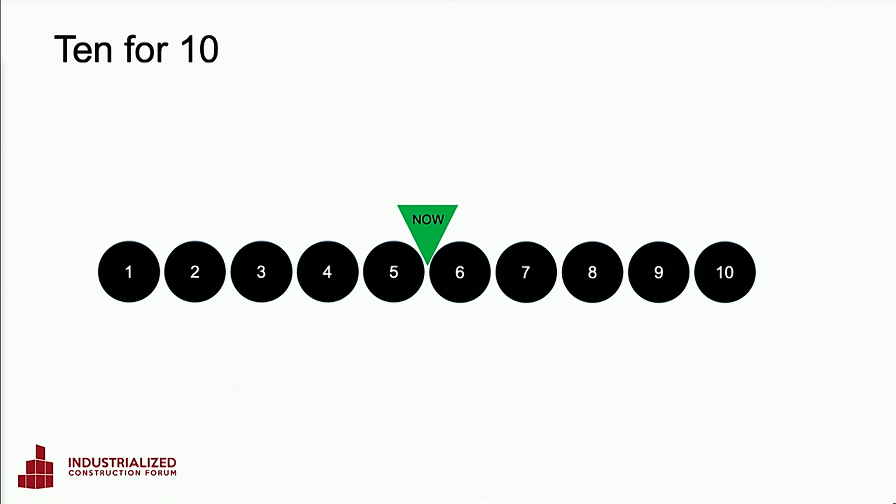Yeah, and so the way we decided to organize our talk, and we wanted to make it a shared talk, which is not easy, but we think we have a format that worked, is we're using the format of 10 for 10. So maybe some of you know the American sports broadcasting company ESPN. They did a 30 for 30, where they came up with 30 short documentaries to celebrate their 30-year anniversary. We wanted to come up with 10 points about industrialized construction to celebrate the 10-year anniversary of this forum, which was started as a way to really create a knowledge exchange and an interest and sharing for industrialized construction.

And then we split that into two different sections. So first, we wanted to look back. We think it's important to recognize what's happened in the last 10 years as a foundation for where we are today. So the first 5 points that we have are related to the past and what we've discovered in the 10 years of doing this event. And then looking forward, we want to give 5 points for where we think we're going, where we think the challenges are, where we think the research and the industry innovation opportunities are in the next 10 years or 20 and beyond. So that's the format we're going for, and with that, I give it to Jerker, who will start with our first one. Okay, thanks.

So we actually took off this journey based on the Swedish roots. And that's because I'm from Sweden. And it all started in 2013. I was invited to come here as a guest researcher, and I spent 4 months here at Stanford. And I brought my research and my industry experience from Sweden about industrialized construction. And I got the chance to give a course about this topic where I could collect my thoughts and my research material and the framework around industrialized construction and bring to the students and researchers around here. And that course became the spark and the start of the journey of IC around here.

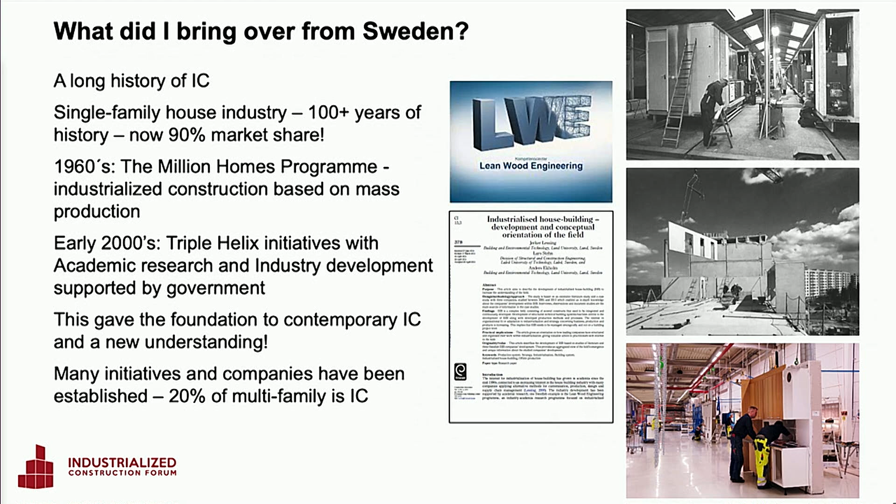But what was maybe more contemporary was the early 2000s, where we had a couple of very important so-called triple helix programs, where industry, academia, and government collaborated to really push the knowledge further about industrialized construction. So that laid the foundation of contemporary and, so to say, modern thinking around industrialized construction. I was part of at least 2 of these programs.

And that gave also many initiatives, both academic, of course, but not least many different development initiatives, and that was really anchored in industry, and that sparked really strong development in our industry, and we can see the effect of that now.

But then, the year after, we organized the first Industrialized Construction Forum in December 2014. Daniel and two other students were organizing, and I was invited as the keynote speaker to talk about what happened, the knowledge from Sweden. So the circle is now closed, I think, in a way. We had some other pioneers from around here, from California. We had Bone Structure, Project Frog, Clark Pacific, ConXtech, pioneers that shared their inspiration and also development and what they saw.

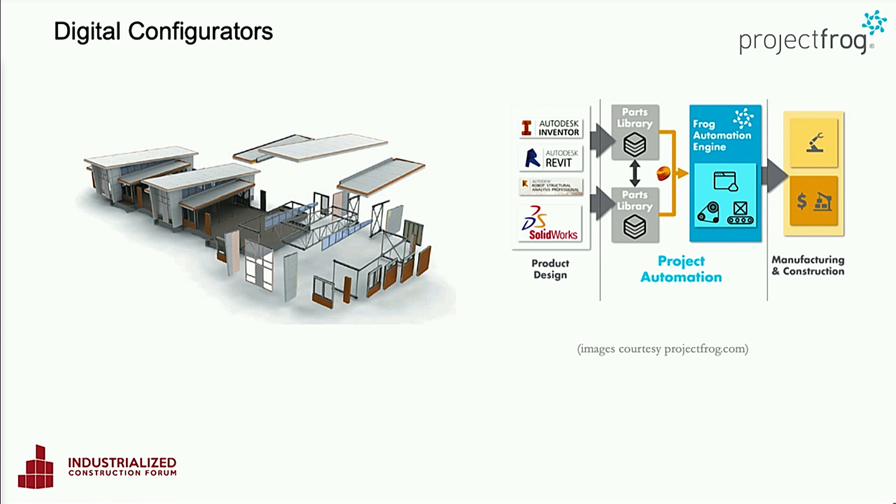They started talking about having a kit of parts, and this was in 2015, but then also taking that kit of parts and building a digital configurator to allow them to coordinate where the parts and pieces would go, to create a kind of design constraint system so that you have a connection between your design space and your production system. And in the meantime, doing this all without themselves owning a factory, but coordinating a supply chain to do that.

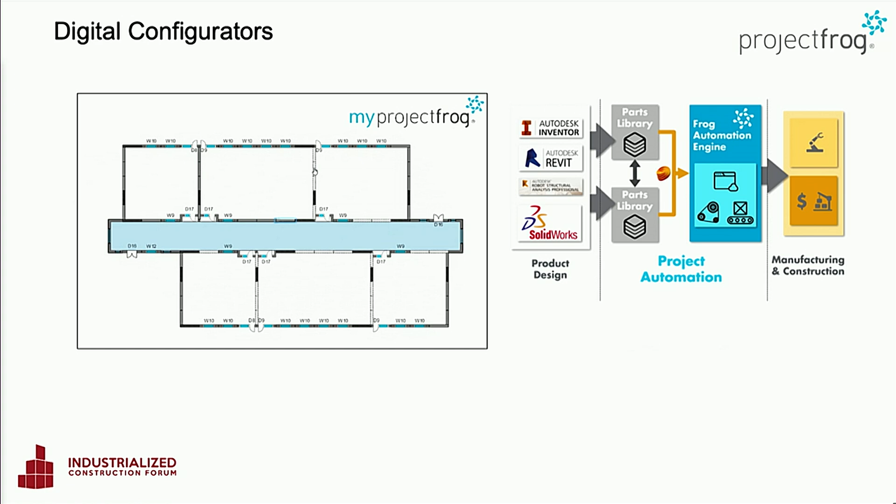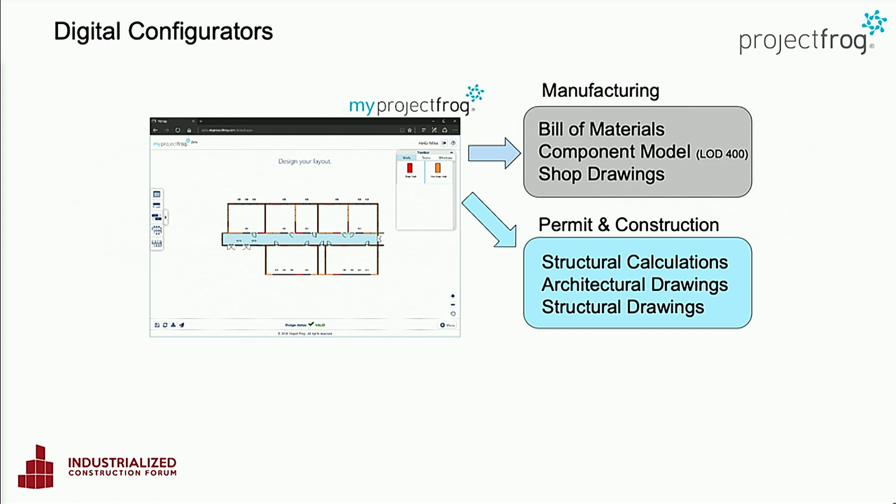And for me, that was really a radical moment to understand that this might unlock some of the ideas that we've been talking about, and also allow it to have an automation process. So from there you can immediately generate your bill of materials, your shop drawings, all your calculations. And they were able to do this in a matter of minutes and hours, in a process that for a normal project built from scratch might take weeks. So that was back in 2015, and for me, I thought that this was the link between the idea of a product platform and mass customization.

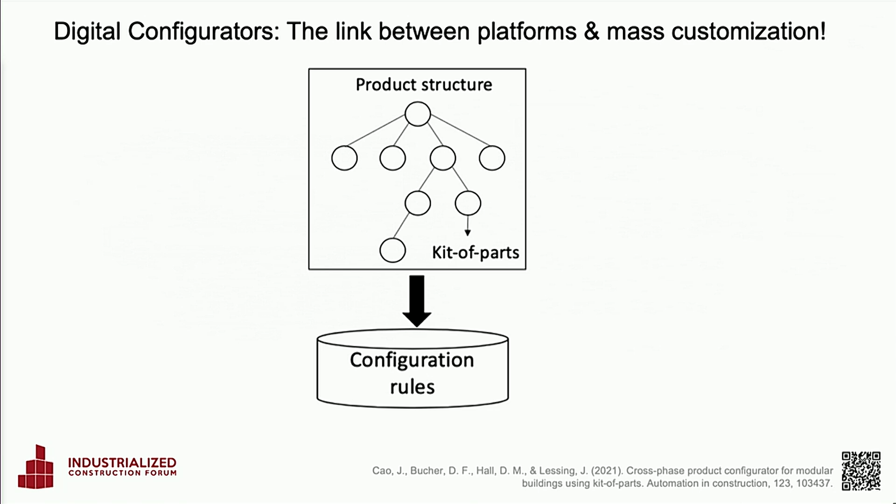And I won't say too much in detail about this, other than that when you have a product structure with a kit of parts, you can then encode your configuration rules in a certain way. And that really becomes a customer acquisition tool. It allows a designer or a customer to have their inputs, their preferences, that don't break the constraints of your system. And in the end, you can achieve this idea of a customized product, or mass customization, which to me seems to have been one of the important goals of the last 10 years: how do we achieve some degree of flexibility that customers want, while also getting the benefits of an industrialized production system.

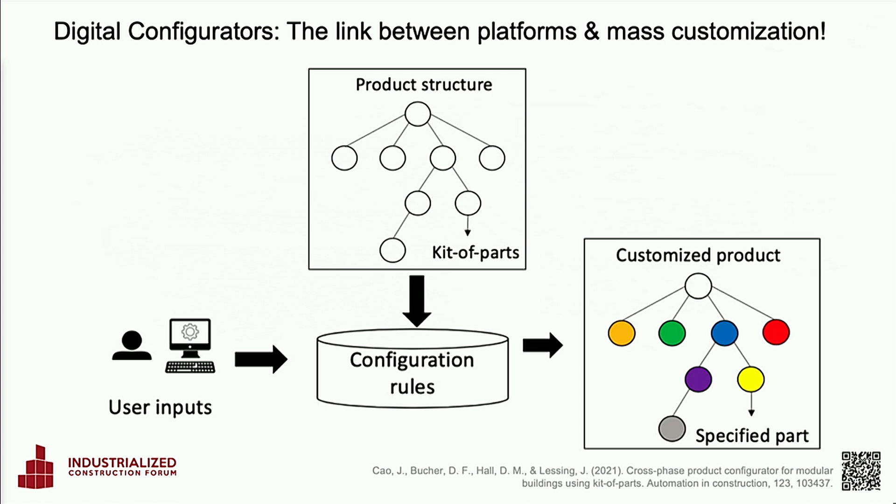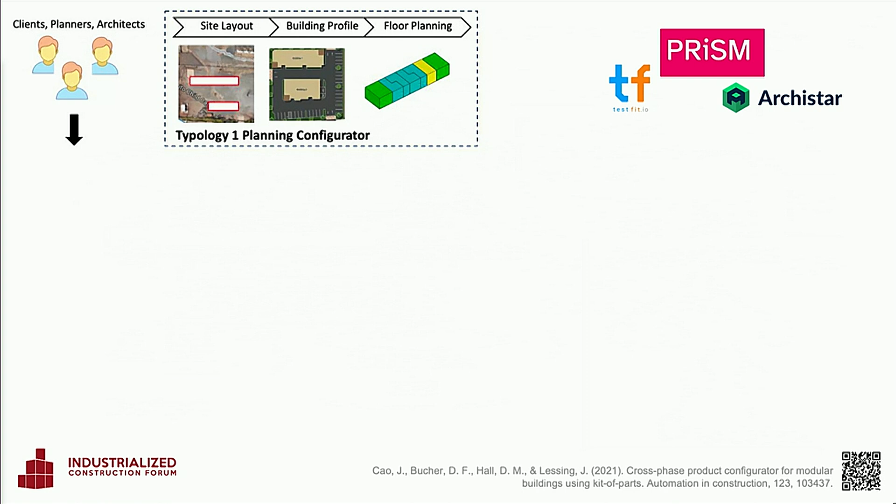And we continued that research, and we identified that there were actually three levels of configurators that people were working on. And many of them are past speakers that we've had in the last 10 years. We have typology 1, which we call the planning configurator, which really helps you at the real estate development level understand the setup of the site, the setup of the modules, to figure out where things might sit. We also have the example of what I'd call a design configurator, where now you're really getting into the design.

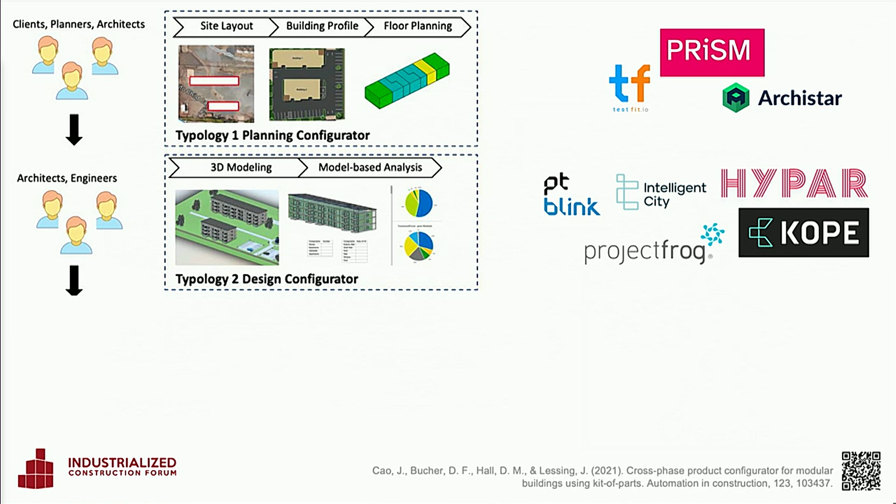And then we've also seen type 3, which is this idea of a production configurator. So there, you're really getting into the actual kind of ERP system for construction, of connecting between the actual layout of your wall panels with your scheduling and bill of materials and et cetera, so managing that.

And so we've seen a number of companies that have attacked or tried to understand this idea of digital configurators in different approaches. And this was our kind of research to help us understand how do we think about these different levels of configuration. But anyways, all of that kind of gave me a perspective of the California digital innovation combining with the industrialized construction approach. And that leads to our third point.

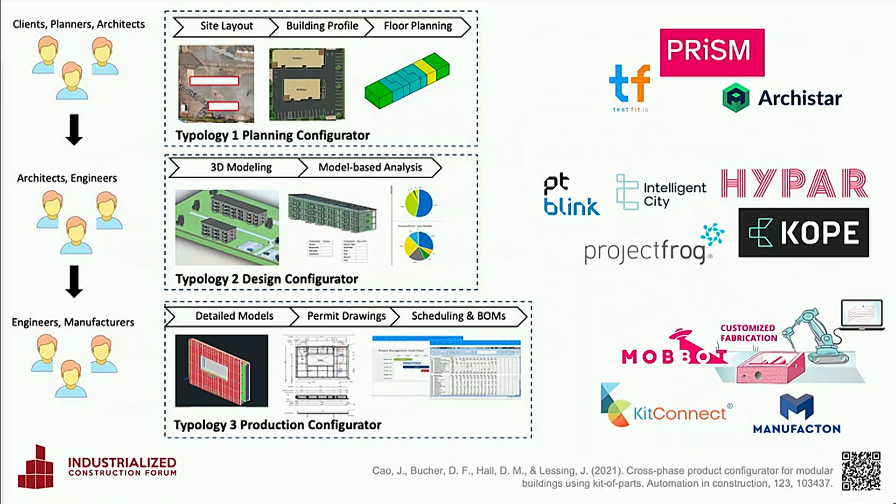Third point is this, that industrialized construction is not the same thing as prefabrication. It's an important part, but these two are not synonyms. And that has been a recurring topic, I think, in talks like this, because it requires some explanations, and going through that has been important, because otherwise I think we would be stuck in more historical ways of seeing what this is about. So I will talk a little about that.

It's not a lecture about it. Some of you were in the intro class yesterday, where we talked a little more about it. But the summary here is that industrialized construction is not only prefab. It's not only the choice of a production method, even.

And if we look a little into history, prefabrication was actually introduced many, many years ago, at least at scale during the 1950s and 1960s. But if we look at the curves that I won't show you, all of you, I think, know the productivity curves, where construction has remained pretty flat. It did that even though we introduced prefabrication. So obviously that did not solve all our challenges in construction.

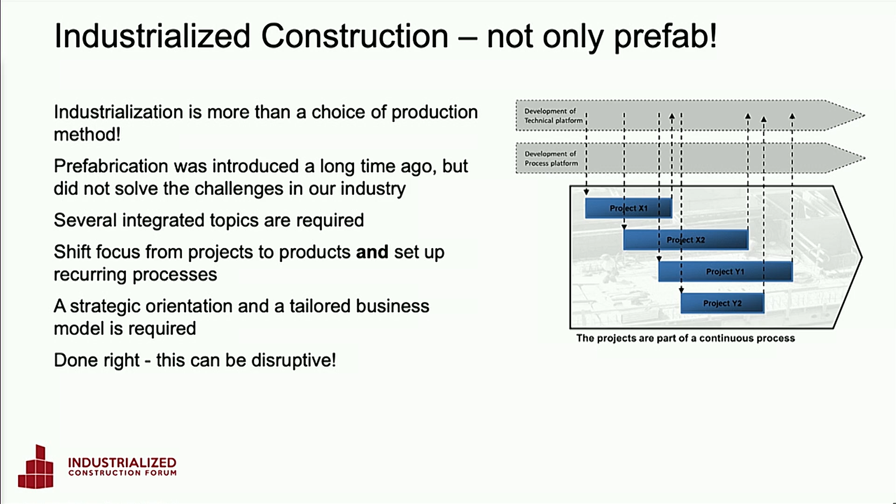And that requires a strategic orientation, tailored business models. Otherwise, if we are, so to say, stuck in the projects, it will be very difficult to gain all the benefits out of an industrialized process. And if it's done right, this can be disruptive for our industry.

Just to emphasize a little more on this, that prefabrication is not alone the solution for our industry. I actually recently found these figures that in Sweden, the use of prefabricated elements for the structural frame for residential buildings is very, very high. It's actually increased from 1995, when it was 62%, to now it's 88%. So 88% of all residential projects use prefabricated structural frames, super high.

But we still struggle in the, so to say, traditional part of the industry with productivity issues and all the other aspects of our industry. On the other hand, a pretty recent study of industrialized construction companies showed that we had an increase of productivity of 20% during the years 2014 to 2020. We had an average of 3.3 months shorter lead times, and we had a cost decrease of 16%, while the more traditional part of the industry had an increase of 20%. So when it's done in this more integrated way, we see the effects coming.

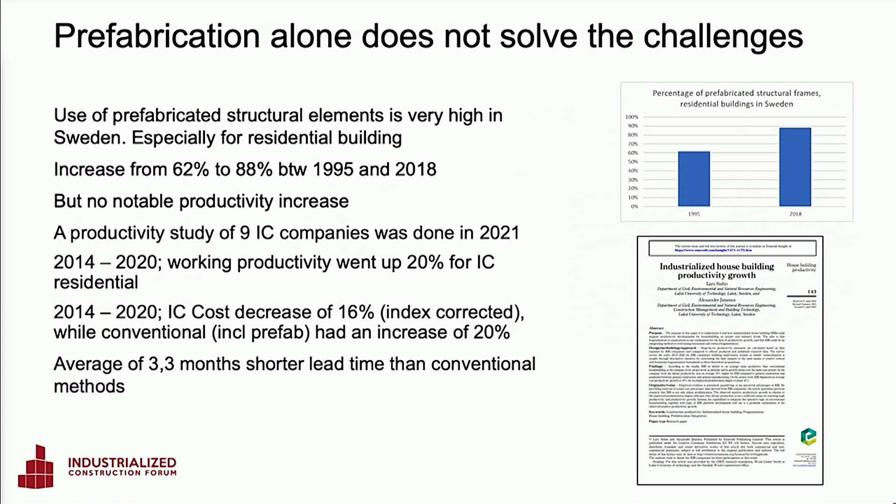Just to give you also this glimpse, okay, so what do we then mean with the integrated approach? Well, this is what I mean by industrialized construction ingredients. All these aspects are needed to create a concept of industrialized construction, but in different ways, of course. And you have seen them all in many, many ways, many different initiatives.

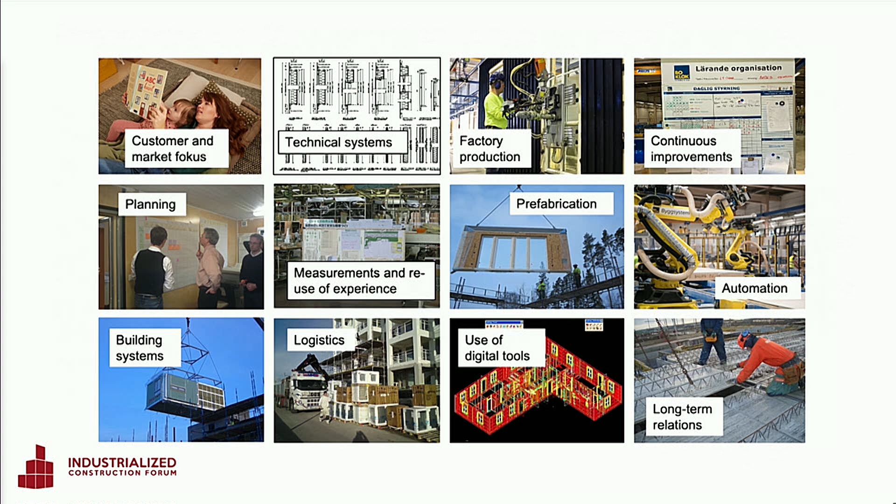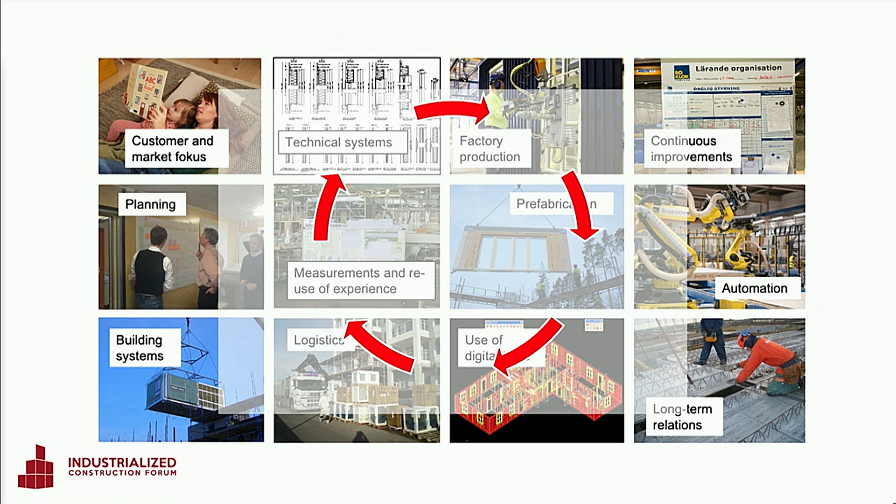The most important thing is integration, that all these sub-areas are required, but they also need to be integrated with each other to create a really strong concept, both in the design aspects and the production aspects, and not least to have a really, really strong understanding and insight about who the customers are and what they want, and so on. So super important to remember this, that prefabrication, production methods, of course, very important, but not the only thing.

And this was also early on collected into this model that many of you have been acquainted to. So saying basically the same things. So that was a very important part of the foundation for what industrialized construction is, and that's what we try to embrace here.

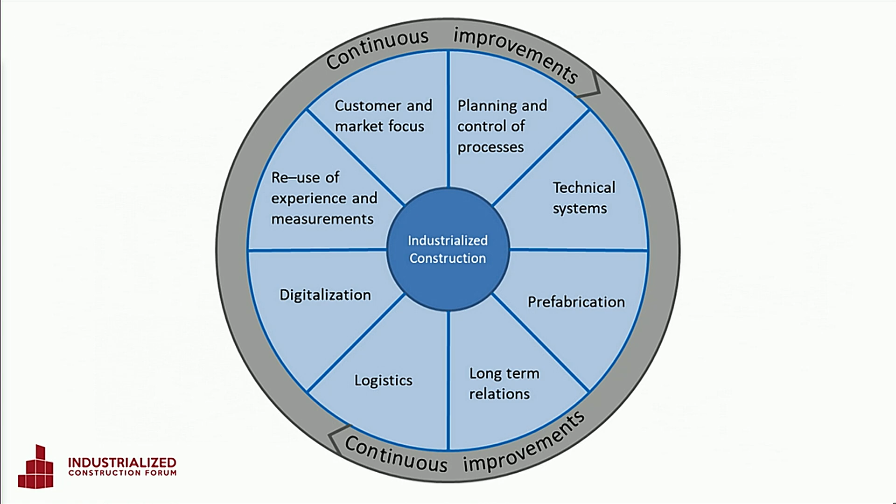And furthermore, what we saw also is that while this model gives a high-level view of what industrialized construction might be comprised of, how you specifically apply that was done by different companies in different ways. And for us, that was a very interesting insight to understand that what we'd call strategies or business models were emerging that would traditionally be the general contractor scope of work, but we saw that companies were taking very different approaches to understanding industrialized construction and changing their business model.

The first one is the idea that a general contractor would say, okay, we want to invest in a kind of spin-off factory, or we would like to invest in a way that we go away from just managing contracts. We want to actually invest ourselves in the factory and building products. And so we've seen a couple of general contractors who typically have a lot of digital innovation also making the next step and moving towards development of their own prefabrication factory.

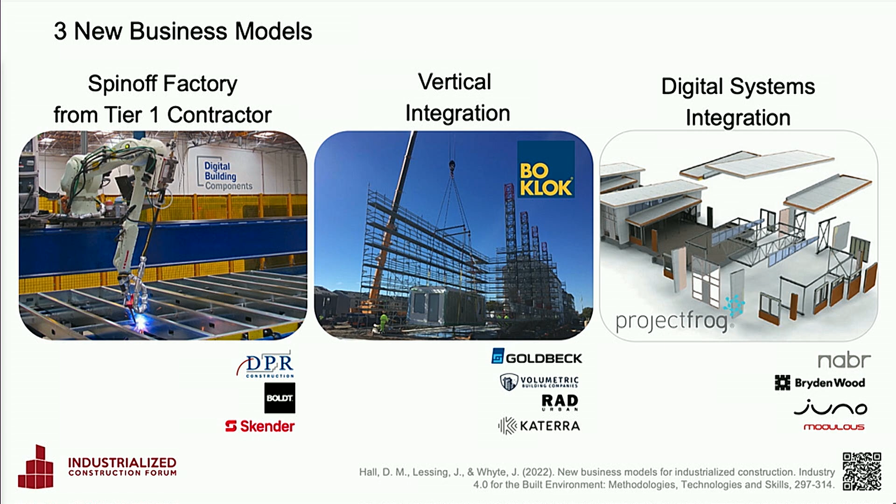We've also seen the example of vertical integration. So we see companies saying, we're going to go for full stack integration. We want to combine land development, we want to combine design and connect it to fabrication and assembly on the site. And we've seen a number of companies with that approach, including BoKlok in Sweden.

And then finally, we have the example of the digital systems integration, which I mentioned earlier. So this is the idea of a capital light, asset light approach. So you really work on organizing and orchestrating the supply chain with a digital system without actually having to own the factory itself. And we saw recently a number of companies that have really gone towards this approach.

In our first session today, you're going to hear also from a set of companies that are thinking about how to meet the needs of their customer. And maybe you can think about also which business model are these companies applying? Is it one of these 3? We also don't say that there is a right business model. People ask, what's the right way to do industrialized construction? And there we often argue it's really about looking back at the customer and the customer needs and the connection with also the production system that you want.

And I think it's interesting, on this list we have companies, and among that list, there's three companies, one in each category, that haven't made it, right? So that haven't been successful. And even a couple years ago, we heard about the challenges of industrialized construction, and we can learn from some of the attempts that did not work.

But just to understand how we see the strengths and weaknesses of the different approaches, for the first one, the nice advantage is that you don't really change your core business. So if you're managing projects and you invest in a spin-off factory, you're not really doing a full shift. You still keep your normal business, but you allow yourself also to have a structured learning process where you're able to learn from the prefabrication approach. The challenge is that you have very slow implementation. You have to really re-educate your supply chain over and over again, project by project, and that can be very frustrating.

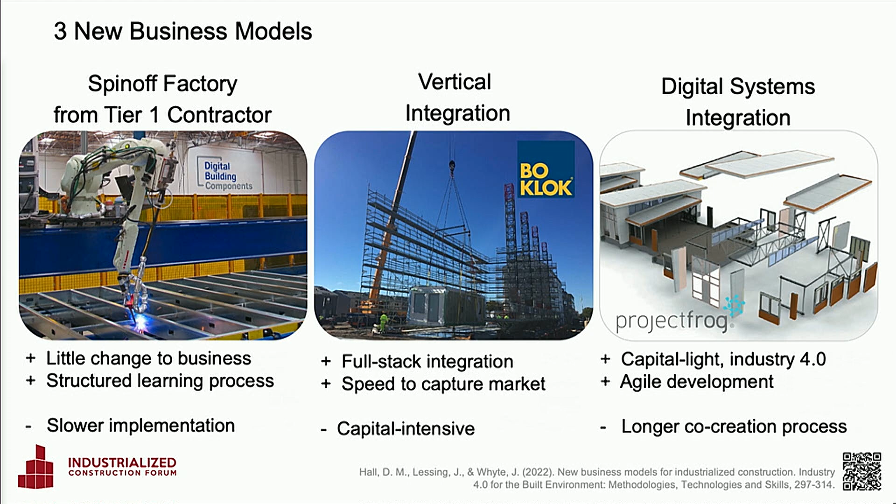So again, these are 3 business models we've identified, and we think that it's very interesting to see how people are evolving their business strategy in order to kind of take advantage of the opportunities that industrialized construction offers.

And then, looking back again a little on history, or very recent history, we experienced the boom, as we want to call it, a couple of years ago. 2018 to 2020, something like that, the interest in industrialized construction really exploded, maybe a negative word, but it grew a lot, at least. That's also when we took the forum from a half-day event to come to this room and fill up with 170 people. And I think that, to some extent, also reflects the big interest in this.

The common insight was that construction needs to change, and industrialization, in some sort of execution, is at least an important part of the solution. And we saw during these years many different reports stating the same things. Productivity is not good. We see other industries doing much better. We can learn from them, and so on. Not least money, cost levels and price levels, super important, but also to tackle the climate crisis, and industrialization was seen as one way of tackling that. We will come back to that pretty soon.

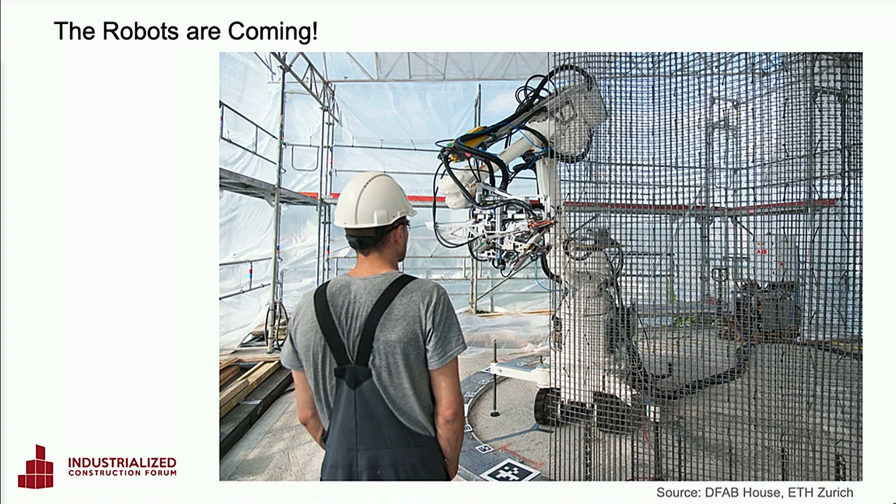And I'll start by saying the robots are coming. Those who have been around this space know there's been a lot of advancements and also a decrease in cost of robotics, both in the factory and on-site or near-site. We see many different applications, highlighting a few people that have spoken in the past, with ideas around robotic fabrication lines, project layout and controls, wearables, 3D printing, and single-task on-site robotics. It would be very interesting to think about how these ideas of robotics integrate with the holistic view of industrialized construction.

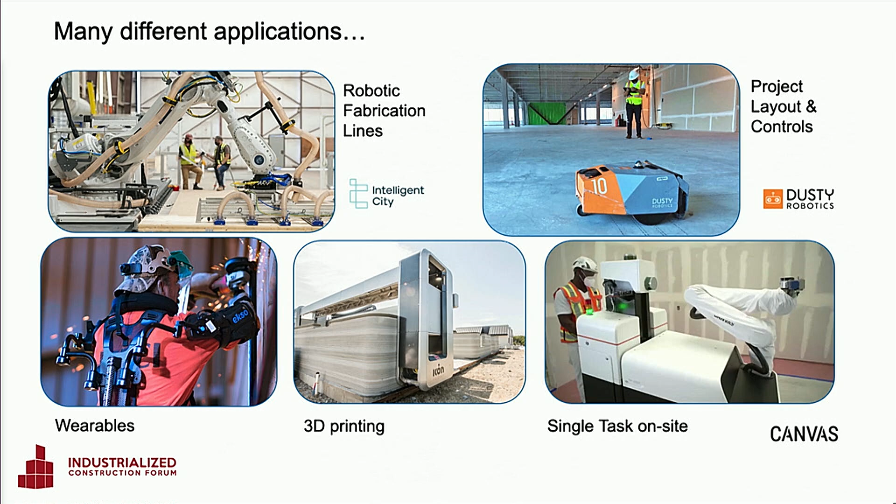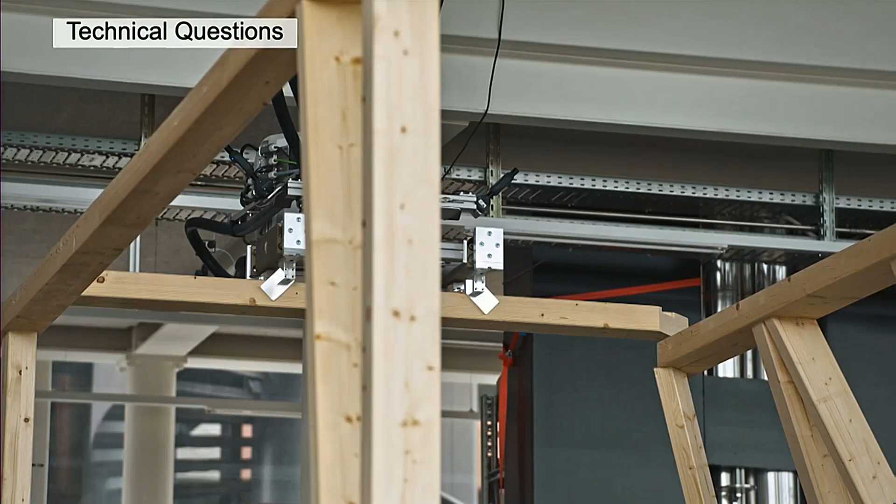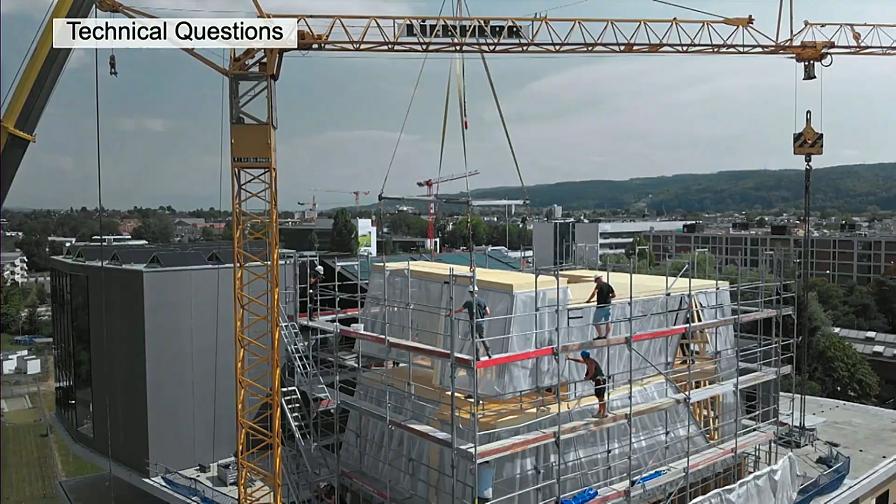They can come together, but there are also important questions to be answered. We have a lot of technical questions, and here I refer back to a project I was connected with as a professor at ETH Zurich called the DFAB House, with spatial timber assemblies, 3D assembled with robotic fabrication. There are questions around computer vision and sensing, fabrication-informed models connecting the file to the factory, and tolerances and how to robotically integrate fabrication and assembly on site. In addition, there are broader industry transformation questions, and the question we always get: will the robots take our jobs?

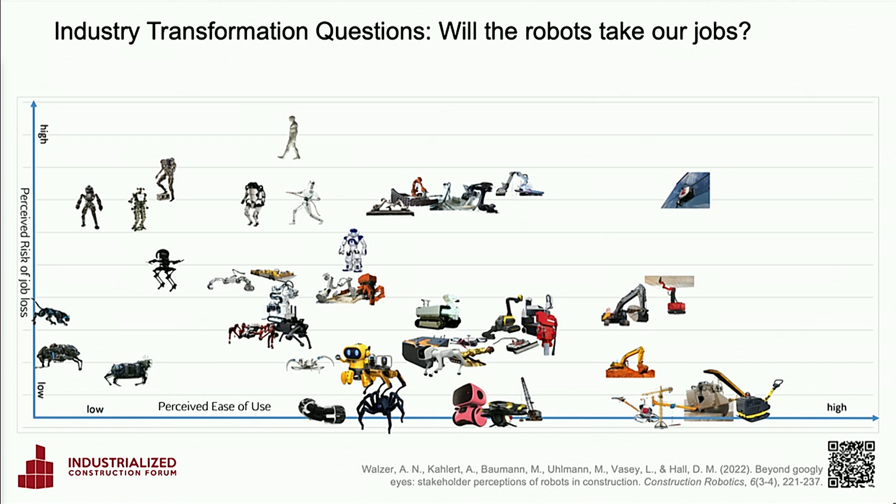This was a study we did a couple years ago where on the y-axis you have the perceived risk of job loss, and on the x-axis the perceived ease of use of construction robotics. And so we were able to map and think about the different ways that workers and managers also perceive the coming robotic trends.

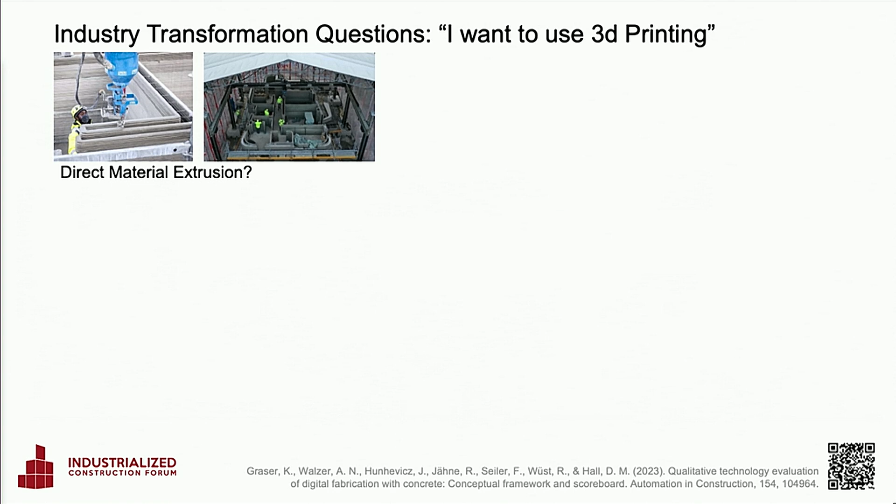We also have a lot of, I think, unknowns and connection between industry and academia. For my favorite example, it connects to a study we did where we have a lot of industry who'd say, I would like to use 3D printing, right? So it's super in vogue. It's all about the future of technology. But very quickly, you ask, well, what do you mean by 3D printing? Because that's a huge question.

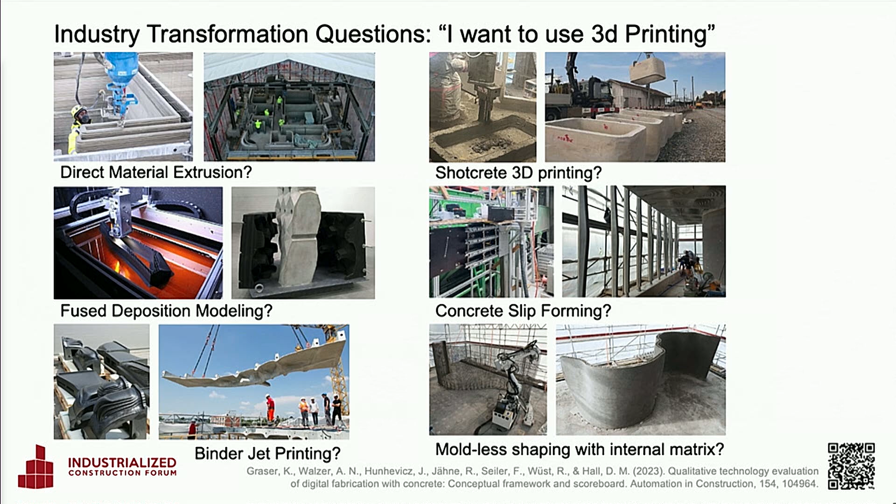Are you talking about direct material extrusion? Are you talking about shotcrete, fused deposition modeling? Are you talking about concrete slip forming? Binder jet printing for the formwork, so you have traditional concrete, or moldless shaping with an internal matrix, right? These are 6 different digital concrete technologies that we identified. And inspired by the view of industrialized construction, we try to also have a holistic view and a framework to understand digital fabrication with concrete.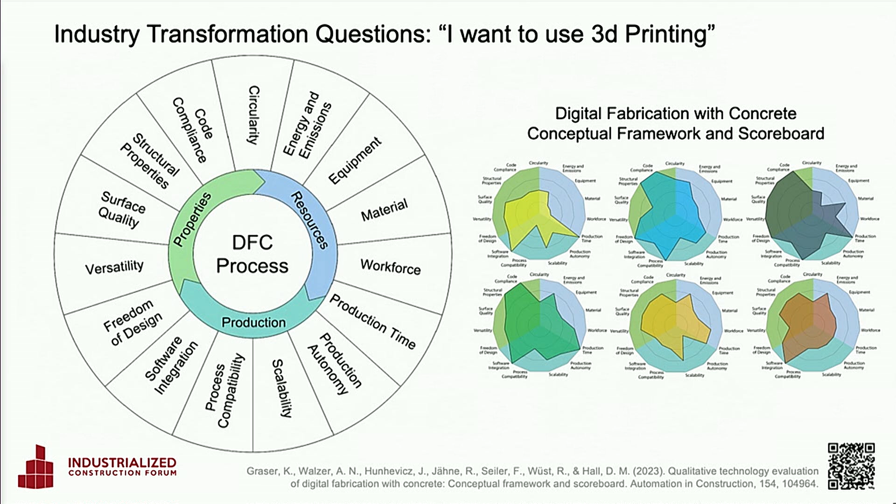And then we're able to also say, okay, if you're an industry and you have certain needs, can we map the needs that you have along these different categories with the specific capabilities of the technology as it exists today, and maybe how we project it to go forward in the future. So on the question of robotics, I think it's certainly coming, and there's still also a lot of open questions that will need to be responded to.

Then, as I briefly mentioned, we are in the middle of this, but there will not be less of this. We will have even more focus and challenges of tackling the climate and housing crisis. Two mega trends that to some extent, or quite a lot actually, are a paradox. Because we have a global shortage of affordable quality homes. We need to increase the building of new homes to fill the needs.

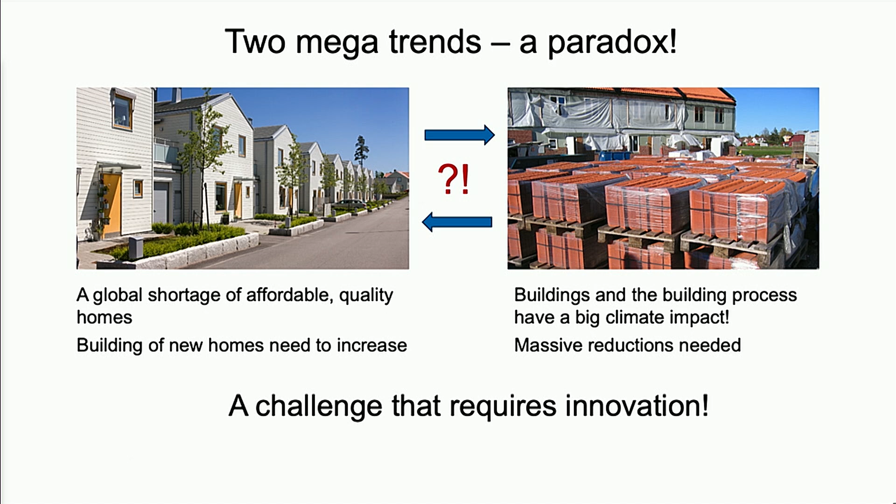On the other hand, as all know, buildings and the building process have a huge impact on the climate. And we actually need massive reductions to deal with that mega challenge. So how can we deal with this? We need to increase, but we also need to reduce. That is a challenge that requires some serious innovation. So what role can industrialized construction play in this then?

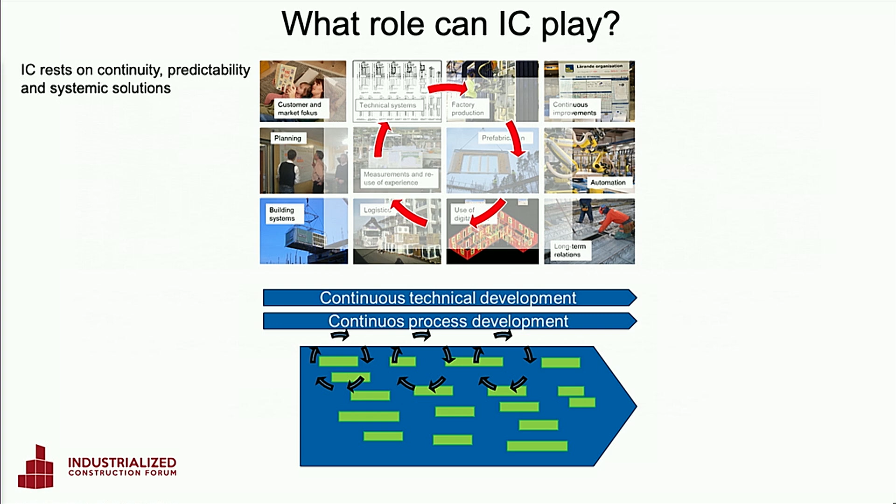Well, industrialized construction rests on continuity, predictability, and systemic solutions. We can design our industrialized construction systems to meet both sustainability and affordability demands, and several others, of course, but we need to have a multiple design focus. We cannot be singularly focused on only one topic, because then we will fail in one or the other aspect. So we need to, and we can, I think, embed sustainable and efficient solutions into our platforms. And in this way, we can create high-performing, scalable housing based on sustainable solutions.

And I think it's possible if we have a strong customer focus, we work with continuous development processes, and we have optimized our system solutions, not least with the use of digital solutions. We need to look into, of course, new and improved materials. We have to go back again to our business models to really see how they can enable and support these massive challenges. We need to design for circularity and reuse of what we have already built. And we need to accelerate R&D in this space.

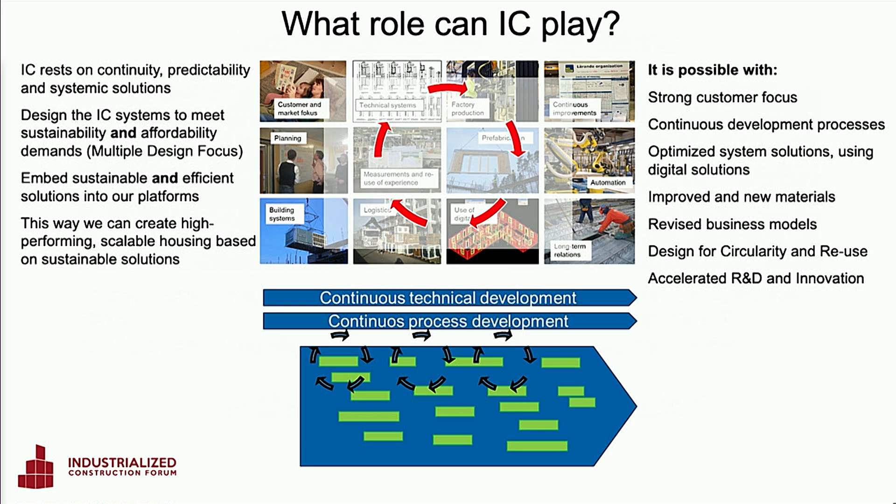The thing is, since industrialized construction is about creating systems that we want to use over and over and over again, if we really embed all these different aspects there, we can really make it better and better and better, and not start over in every project, because then it will be too slow. I don't say I have the solution, I just say that with these principles, we have at least slightly better conditions to tackle these massive challenges. Then I think we are better off than continuing as we have always done, so to say. So I think there is a really interesting opportunity here for industrialized construction as a concept, and also for companies and organizations taking on these challenges.

Yeah, and I want to zoom in on a specific subset of the sustainability conversation, which is around the idea of circular industrialized construction. For those who don't know, the idea of a circular economy is that instead of a linear economy where we take materials and dispose of them at the end, we want to transition into more circular material loops where we are reusing and remanufacturing elements and components in order to meet some of the demands of resource scarcity and climate change.

In particular, we've done some research about the opportunities for resource efficiency and circularity in industrialized construction, and we created some categories to understand it. Now, these are not guarantees, they're opportunities, right? But as Jerker said, we think that industrialized construction and the thinking about supply chain is much stronger compared to building a new project-based supply chain from project to project.

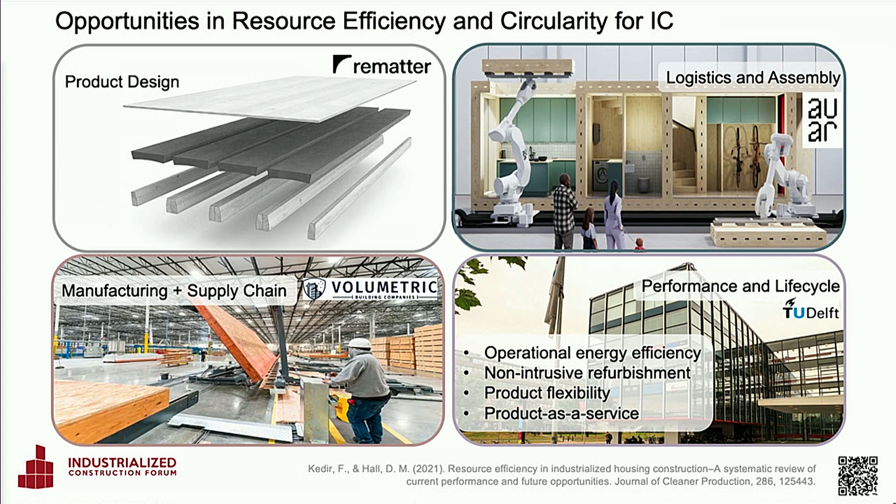Finally, we have opportunities around performance and life cycle. That includes energy efficiency, but also refurbishment and renovation, product flexibility, and product as a service. Here's an example of a facade at TU Delft, my university, which has been a product-as-a-service model since 2016, where the facade is rented and can be recovered by the manufacturer, reused and put back into the cycle. We're going to hear a lot more about this afternoon in a session focused on resource efficiency and circularity for industrialized construction with 3 great speakers.

Another challenge, but also massive opportunity, is our developing countries. With a lot of similarities to what I just talked about, we have huge needs but also huge potential. If we look at the estimations, the global population is estimated to grow by 2 billion people between 2020 and 2050, and 1 billion of these are estimated to be in sub-Saharan Africa. Urbanization is a global trend, estimated to grow from 50% to 68% in these years, and a majority of this growth is in Africa and Asia.

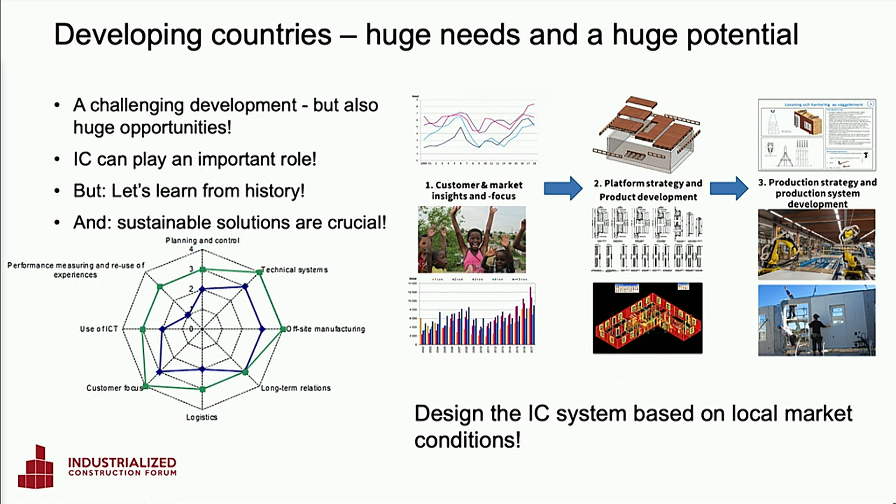But done right, that could be a very, very interesting opportunity for the markets and to tackle the huge challenge. And we think that industrialized construction can play a role here, especially since it has to be scalable and it has to be sustainable and predictable in that sense. Then I think industrialized construction has some of the ingredients to tackle this.

And that brings us to our last point, which is about the networks of industrialized construction. We're now in the age of AI, right? So everything's about networks, everything's about graphs. But I was thinking about the idea of networks being really important in the future. Both on the technical level, we thought a little bit about the idea of an interconnected network of, we used the word cloud manufacturing to explain how you would have different resources and capabilities of machines tied to different production systems. So for us, there's a lot of technical opportunities and supply chain opportunities with networks, following this idea of Industry 4.0. But there's also the idea of networks that work on socioeconomic research.

I mentioned earlier my connection, which I'm still involved with, this large center based in Zurich, Switzerland, where we're actually looking at the interplay between the individual and the work system. So, how do we think about work design, human-machine interaction, and skill requirements? How do we connect that with projects and upscaling of adoption and scale-up, interdisciplinary collaboration? And how do we connect that also with the firm and the market when we think about business models, market opportunities, and entrepreneurship, and also investing in these types of technologies? So there's an example of a network effect there.

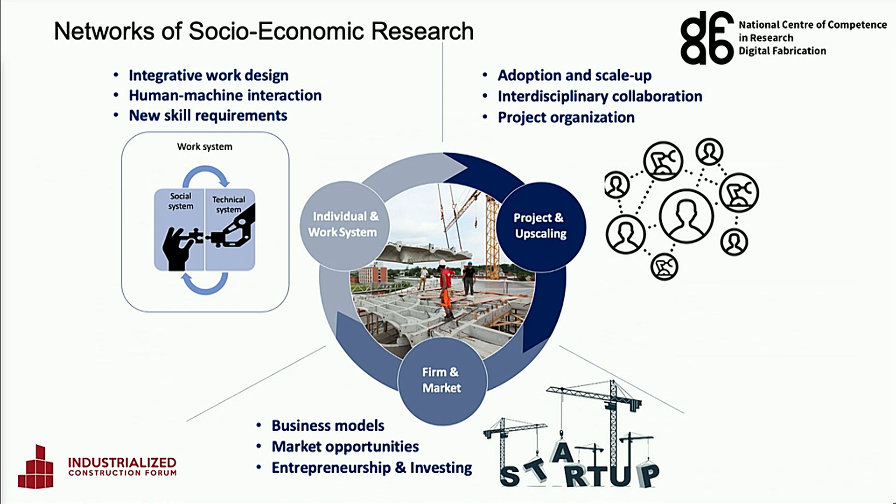And we've seen some emerging networks of R&D, research and development, between industry and academia. I think most recently we heard last year from Matthew Aitchison about the Building 4.0 CRC, the very large network of industry and academia in Australia. In fact, they've brought 30 people this year to our event. If you feel like you're talking to a lot of Australians, it's not a coincidence. There's a big delegation here.

But there are a number of different initiatives and networks, and we're actually going to hear more about that at the end of the day today. So we'll talk about what is the role of networks and consortiums in advancing this idea of industrialized construction. And so with the summary, I give it back to Jerker.

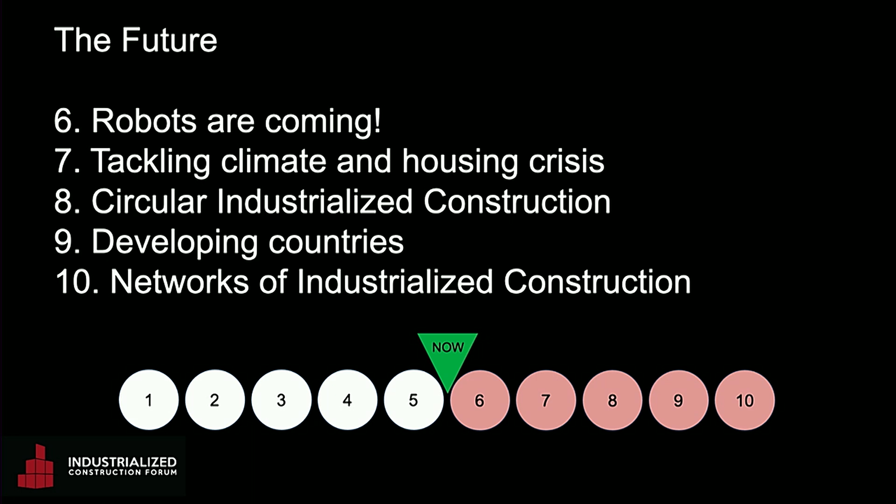Yes, just summarizing what we talked about. The robots are coming, we think. They are already here, but there will be more. We will have some interesting development there. Tackling the climate crisis and the housing crisis is a huge challenge, huge opportunities too. We can use industrialized construction principles to work with that. Circular industrialized construction, sort of same theme. Developing countries, also same theme. Massive challenges, but also really, really interesting opportunities. And it requires R&D development, and that's not possible to do alone, so we need to do that together.

So, challenging, but also super exciting times ahead, and I think we have also a very interesting and exciting day in front of us. Some of the things we have mentioned here are actually also topics that will be covered during the day today. So we will dig deeper, and it will be a very interesting and good day, I think. So thanks a lot from us.

Do we have time for questions? No, not really. 10 minutes late. Yeah, we're late. We are already late. So let's focus on coffee, get fueled up, and then we will continue. Yeah. Thanks.